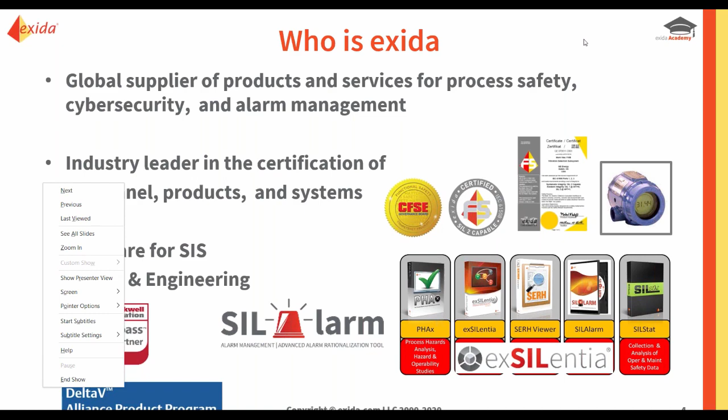So we're going to talk about alarm philosophy. My goal is to make you great philosophers by the end of this webinar. We're going to talk about what is an alarm philosophy, why you need one, what's supposed to be in it, what is the content, and we're going to deep dive into a couple of particular areas like alarm prioritization and classification. And then we're also going to talk about some lessons learned and what are the keys to make this process successful and change the paradigm for the way people do alarm management at a site. So we're going to talk about tips and tricks and lessons learned.

First, a word about terminology. There are specific meanings behind words like shall and should in the standards themselves, and we're going to be talking about both the ISA and the IEC standards, more on what they are in a second. We will strictly interpret the words shall and should according to a specific way. If we see the word shall, that means that is a mandatory requirement, so you must do that. If you see the word should, that's a recommendation. That applies for interpretation of what is in the standard. You should also apply it when you put text in your alarm philosophy document and follow the same convention. If you use the word shall, that is something you're committing to do - that's a requirement of your organization to do that task. And if you were to be audited and it was found that you were not doing that, then that would be a potential finding. So we have to be very mindful of the terminology we're using when creating a philosophy document.

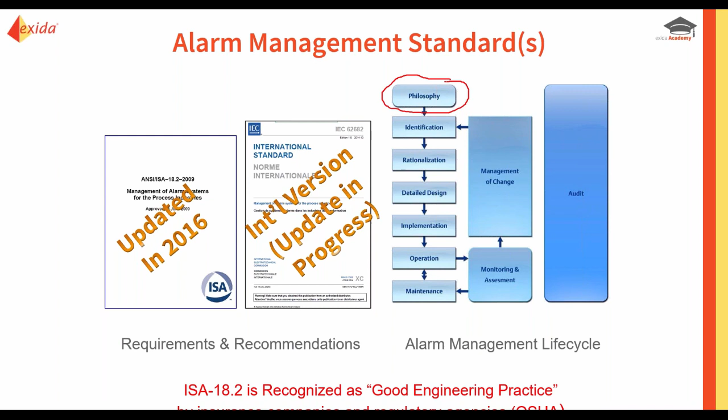It's the first one, so that's what we're going to talk about: how to create the philosophy document that essentially fulfills that stage of the alarm management lifecycle.

If we want to conform or comply with the standards, let's talk about what that really means. If you want to conform to both ISA and IEC, that means you would execute all of the mandatory requirements—any shall statements you would comply with.

When it comes to the use of specific functionality, we'll see that in the standards, there are certain functions that are required to be in the control system. A good example is alarm shelving—a very important tool to help the operator. The capability is a requirement for the control system, but it's not required that you as an end user use it. Your philosophy is where you document what your intent is: do you intend to use that functionality or not, and how? Specifically with alarm shelving, that's an area where we do need to do that.

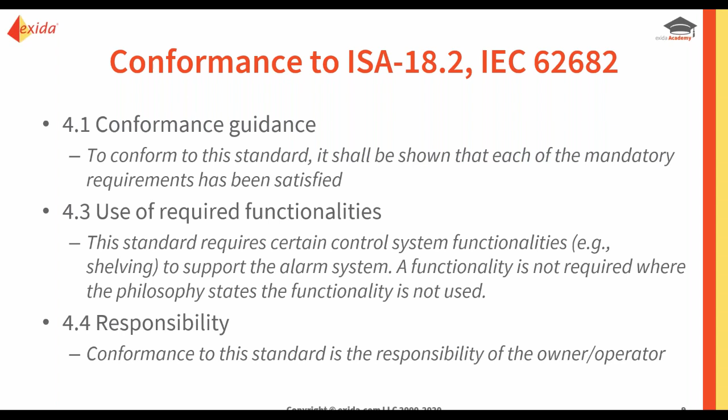When it comes to the responsibility for complying with the standard, that ultimately resides with the owner-operator of the system. So now let's talk about whether you actually need an alarm philosophy and what the guidance is in these standards about having one.

If you are a new system, let's say a greenfield plant, the expectation is that you would develop the philosophy, drafted as part of your project planning, and that you would have it defined and approved before you begin alarm rationalization. Looking at our screenshot of the alarm management lifecycle, the philosophy is really one of the first main steps of getting into that lifecycle.

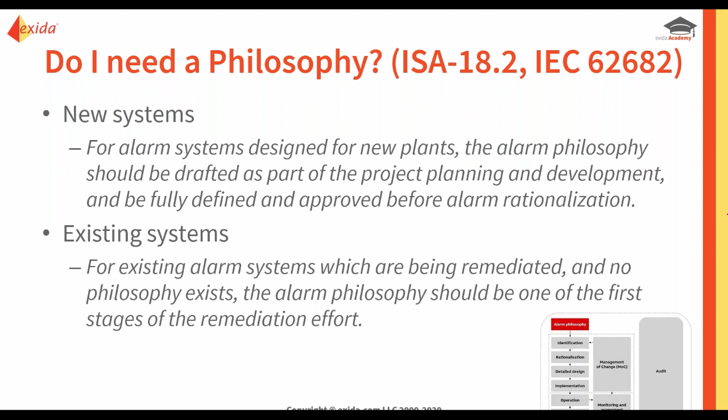For existing systems or brownfields, where you're doing a remediation project to fix alarm management issues, if there is no philosophy yet, then one of the first tasks would be the creation of the alarm philosophy. If you notice, the word 'should' is used in both cases related to having an alarm philosophy, so it's a recommendation that you would have one of these documents.

In terms of getting started, and what you need to do to be ready to do a philosophy, if you're a brownfield existing system, I would recommend doing some initial benchmarking first, where you measure the actual alarm system performance, find out how many alarms you're getting, nuisance alarms, what are some of the different scenarios where the alarm system is not performing well. We'll also do some qualitative assessments with interviews of the operators, which would give you a wealth of input on the shortcomings in the system right now that you'd hope to solve by creating the alarm philosophy document. It's a good input to the philosophy creation process.

You can notice here in this seven-step process that the alarm philosophy is the second step, and it's really the overriding guidelines that drive the continuous improvement approach to the alarm management lifecycle. We really can't enter into the alarm rationalization process without that alarm philosophy in place, because it provides the key rules and guidelines for how to do rationalization.

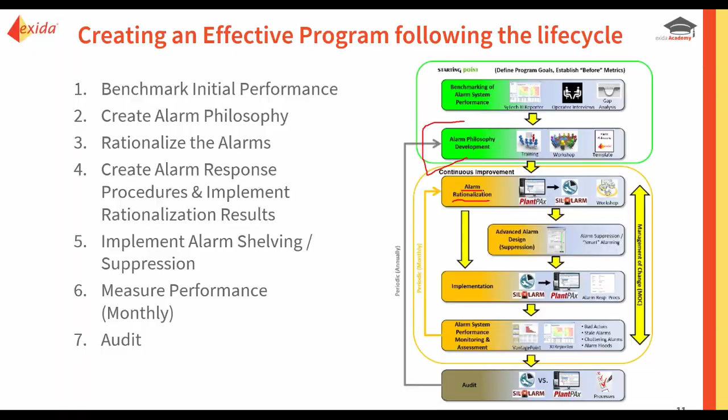Now we're going to talk about what should go into an alarm philosophy, and we're going to see a little bit about the evolution of the standards for alarm management. Standards define the requirements. Here we have a list of the content that is supposed to be in the alarm philosophy, and you can see there are two different options: required content and recommended content—shall and should.

When the standard was first created by ISA in 2009, this is the set of requirements. When the IEC standard was first published, we added the alarm audit topic, something we sort of forgot in the first version. Then when the ISA standard was updated in 2016, we added a few more considerations, some of which we're going to talk about today: alarm response procedures and alarm shelving.

So now we are on to the update cycle for the IEC standard. Basically every five years, these standards need to go through a review and update cycle, so we're going through and reviewing the content here. I would expect that to maintain consistency and build on what's been developed so far, the IEC standard would take on board everything in the 2016 version, and then consider adding or modifying what's there. That process is going on right now.

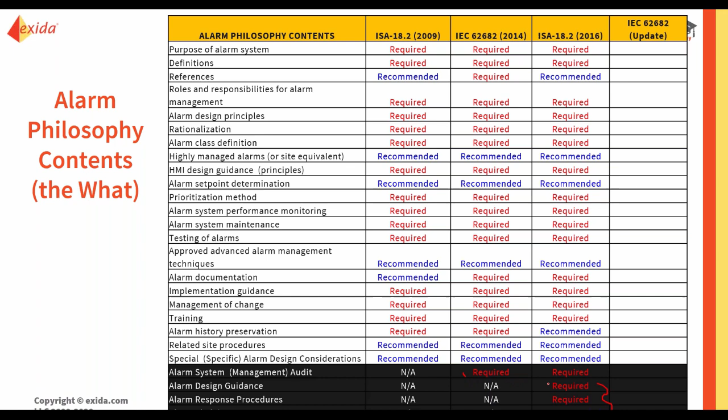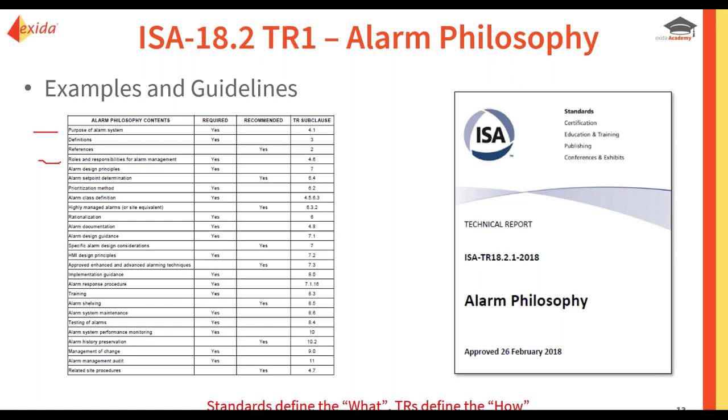Now, the standard defines the what. When it comes to how you do things, that's what technical reports are for. So to help in the development of alarm philosophies and to provide guidelines and examples, there was a technical report created, and I had the pleasure of helping to write that document. It came out in 2018, and for every one of those areas that needs to be defined, there are examples and guidance contained in this technical report. It could be recommendations on how to do things, or examples that one could take and potentially plug into their own philosophy, but it is not a philosophy unto itself. You could not take this document and say, this is our philosophy. It's not designed to do that. It's designed to give you examples and things to think about when you're creating the philosophy yourself.

So why do we want to create an alarm philosophy document in the first place? Well, to create an effective alarm management program that's able to maintain itself and sustain over time, that's what you need the philosophy for. It's really the framework or the blueprint for a successful program, particularly in areas like defining roles and responsibilities for what people in the plant need to do related to alarm management. That's how you create a program that runs on and continues to work even as people change and move to different positions within the organization or move on in their careers. So it's really critical if you want to create that continuous improvement outlook.

It also helps to create a common understanding of alarm management amongst everyone that's touched by it. Alarm management is not rocket science. It doesn't appear to people like it is that challenging or difficult. But if you do it incorrectly, you can cause a lot of problems for yourself. And that's sort of what we've gotten into, where people think they know what to do, but they don't really know the best practices, and they go down a path that leads them to trouble. So part of what we want to do in this process is educate people on a different way of doing things and codify that within the philosophy.

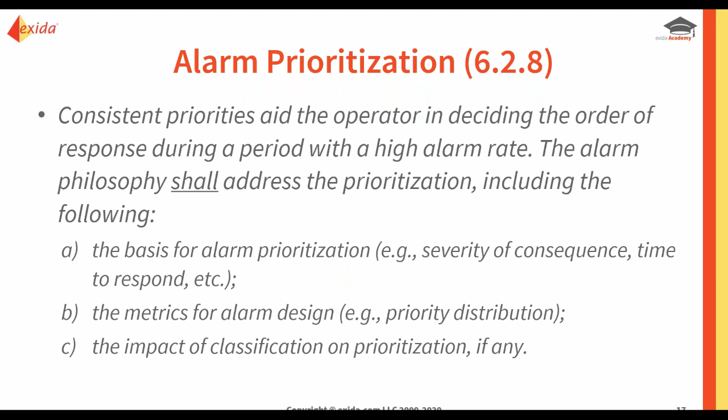So now let's talk about some of the particular topics that need to go into a philosophy. The first one we're going to look at is alarm prioritization. Here on the screen are the requirements for that from the ISA and IEC standards. The alarm philosophy shall address how to do prioritization, meaning we must talk about how you will do alarm prioritization. It then provides some recommendations on content that should be there or that should be considered. So let's dive into how we might do that for a given site or plant.

So the definition and understanding of what priority is for is a key teaching point. People need to understand that the alarm priority is really a way to differentiate the relative importance of one alarm judged against another. It helps the operator know when there are multiple alarms, which one do I respond to first? Which one is more important to the business?

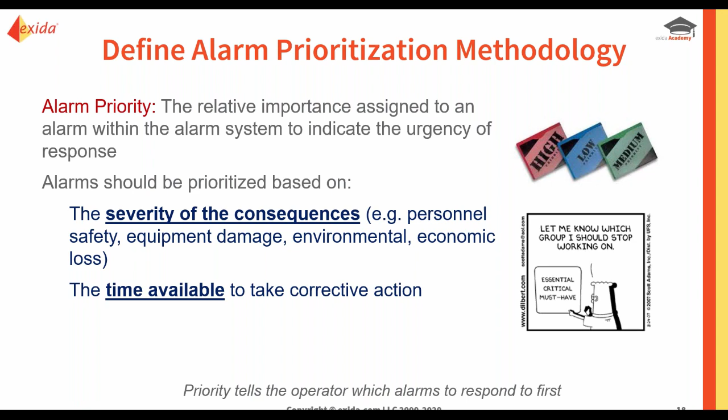And the way you assess that is typically based on some combination of evaluating how bad the consequences would be and how much time the operator has available, the allowable response time.

So in our philosophy, we want to define our alarm priorities. It's not recommended to have any more than 3 or 4 different process alarm priorities. And we're shooting for a priority distribution where we have just a small fraction of the alarms at the highest priority, nominally 5%, more at medium, and the majority at low.

Now, when it comes to the naming conventions for priorities, in some control systems you have the ability to define that, and many of them you do not - it's hard-coded. If you do have the ability to define them yourself, you might want to think about whether the use of high and low for priority names is a good idea.

Because those are also used as alarm types, that means you will have information displayed in the alarm summary where one column says the alarm type is low, and another column says the priority is high. In an upset, that can very easily get confused. So from a human factors point of view, if you can come up with different verbiage for that, it's probably a good idea.

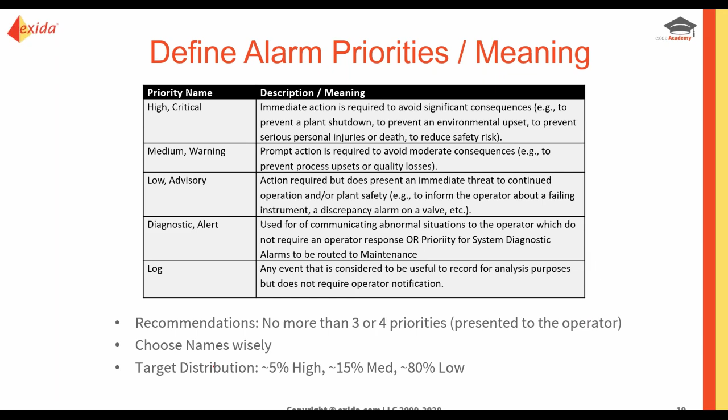You also want to then define how do we evaluate the consequence, how do we judge it? We'll define different impact areas or risk receptors, typically personnel safety - that could be for employees and for the public - environmental and financial. So we want to define what those categories are, and hopefully you don't have to define them yourself from scratch. Hopefully you have a corporate risk matrix that you can use as a starting point.

What we're after here is really this portion that talks about how to assess or evaluate the consequences. It has our impact areas, and as we go from left to right or right to left, the consequence decreases. Now, another part of this matrix up top is the likelihood and the risk. Well, that's not relevant for alarm prioritization. Likelihood or probability is not part of the prioritization methodology. We're only interested in the consequences here.

So ideally, we want to start with this because this is a reviewed and vetted matrix related to business impact and risk management that's likely been reviewed by legal, probably, as well as process safety, etc. Now, when we look at this, to make sure it's going to work for alarm management, we might make a few changes.

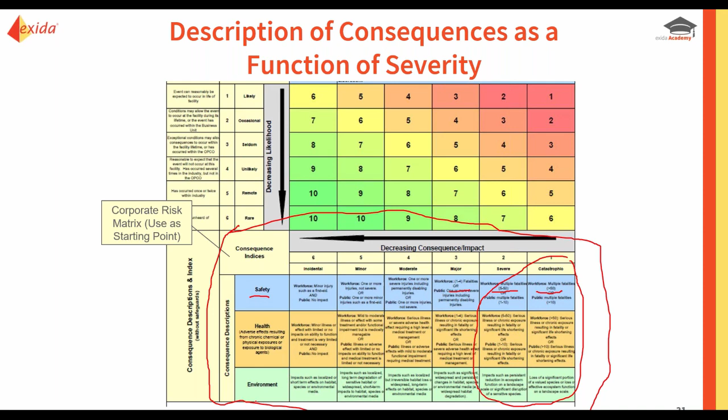The other element of tailoring a PHA matrix for use with alarm management is we need to have some financial considerations. In this one we're looking at, we have personnel safety and environmental, but we don't have a financial way of evaluating the potential consequence of an alarm. And what you typically find during rationalization is most of the consequences are financial related, either a cost to production or damage to equipment and assets. So we need that to make a complete matrix.

So here's an example of a matrix that does, in fact, in this case, have some financial considerations. So other things that we need to consider: we need to make sure that the terminology is pretty understandable, that it's unambiguous, that everybody would assess the consequence in the same fashion and come up with the same answer, ideally.

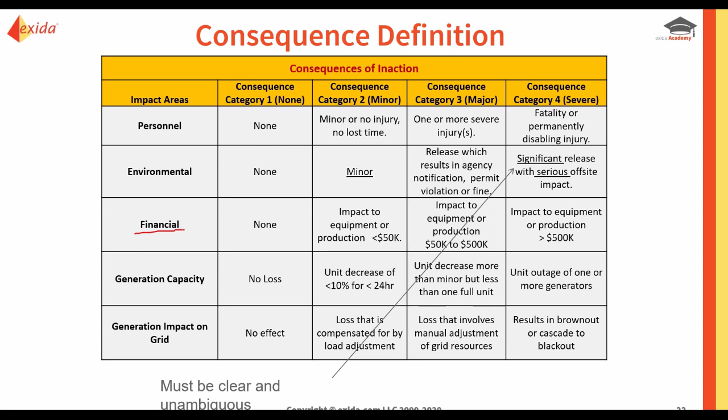We also need to make sure that it's understood that the consequences described in a given column should all be considered equivalent criticality. So that means we have up here fatality, and down here we have a financial loss of $500,000.

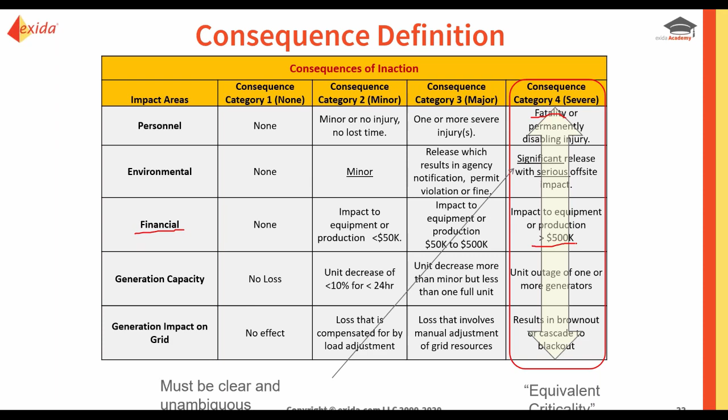If those are considered equivalent, we've just put an estimate on the value of human life, and it's not very high. So if an incident occurred and someone lost their life, a lawyer could look at this and say your risk management approach did not value human life very significantly. So you never want to take somebody else's matrix and use it as your own. This has to be developed and vetted internally within the company with consideration from safety and from legal.

We also need to define some way of evaluating how much time the operator has to respond. We'll call that the allowable response time. One way to think about it is either you need to drop everything and respond to the alarm right away, or you can finish up one task and then respond, or perhaps the alarm is not as urgent and allows you to start a new task before you begin the response. Some kind of way to qualitatively estimate how much time the operator has to respond.

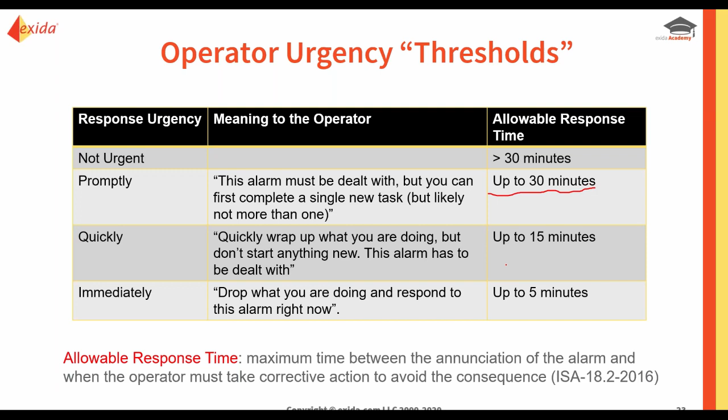Some other things to consider in this case: we might want to note that we need to do something different if we end up with an alarm where the operator has less than 5 minutes to respond and they're doing that to prevent a fatality. That's not a good design case. So we would want to try to do something to add other layers of protection.

Ideally, we want to ensure that there's sufficient urgency anytime an alarm occurs. So something that's got more than 30 minutes to respond, sometimes I've seen people treat that as a no-alarm situation. Well, I'm not sure that's the right way to do it, because there is still going to be the consequence. So maybe it's a lower priority alarm, but there's still some potential that something is going to happen.

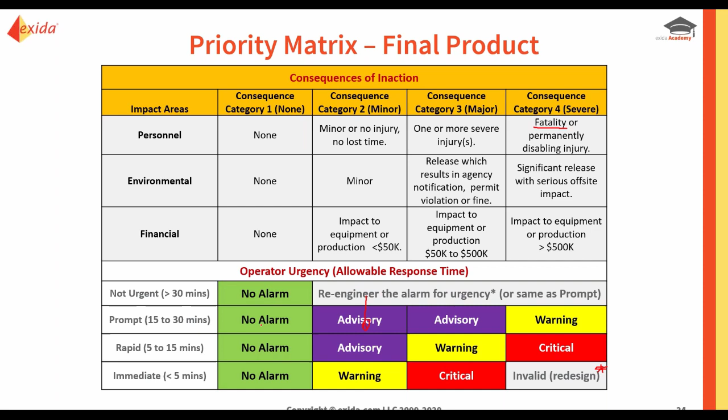So in some cases, we may try to change the design to push the alarm into something where the operator knows that they need to respond relatively quickly, or we may just say that the priorities for this band are the same as what's down here in this row that says prompt. So advisory and warning in this case.

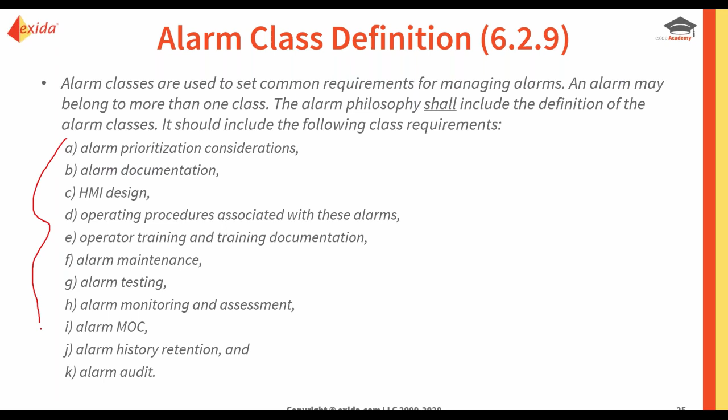So now let's talk about alarm classes and alarm classification. The alarm philosophy shall include the definition of the alarm classes. So you need to define what classes you're going to use. And when it comes to that definition, relevant information about these different characteristics should be part of that.

So classification is really a process for assigning alarms to groups that have common sets of requirements for things like testing, training, MOC, and reporting—anything related to the management of the alarm. This gets to the fact that not all alarms are created equal, similar to passengers on a plane and the way airlines treat first class passengers differently than economy class. Same goes for alarms based on the alarm classification.

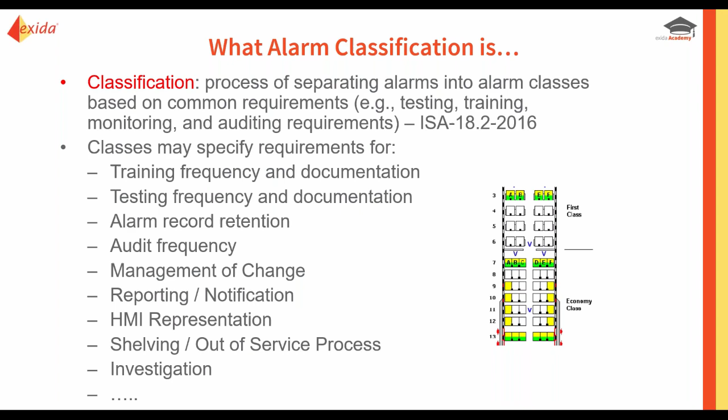So one way to think about classification is that it indicates what is the main purpose of the alarm—what are you trying to do with it. So it allows you to differentiate, of all the alarms in your system, which ones are there really for personnel safety, which ones are for environmental.

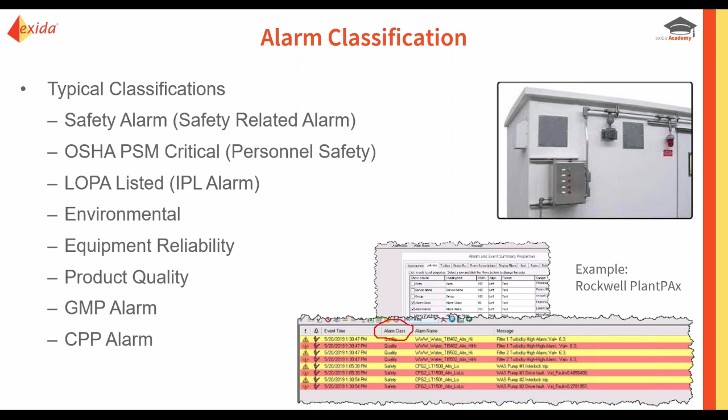And we're going to look at some examples that relate to alarms that we will say are LOPA listed, meaning they're called out in a layer of protection analysis. One of the things we're also going to talk about is how alarm classification shows up in the control system. Here we have an example from a Rockwell control system where the alarm summary display has the ability to present the alarm class, and that's a parameter that can be filtered by—so it's native in the control system.

Now there are different acceptable ways to interpret alarm classes and what they mean. The one that we have talked about is using categories that kind of directly relate to what the purpose of the alarm is.

Is it for personnel safety, equipment reliability, or product quality? That's the recommended approach, I would say.

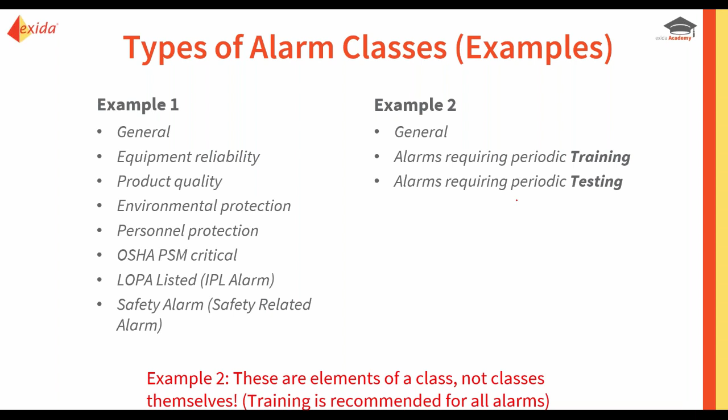It is also acceptable, though, when you interpret what's written in the standard and in the technical report, to create classifications that relate to alarms that require training or alarms that require testing. I have seen some alarm philosophy documents created that way. To me, personally, that second example is not the best way to do it. If you do it that way, you're really losing out on a lot of the potential benefit of defining the classification. Let's see what I'm talking about.

Part of what we're striving to do is define, for our different classifications, the fact that they have different requirements when it comes to things like testing and training, and it's up to you to define what those associated requirements are.

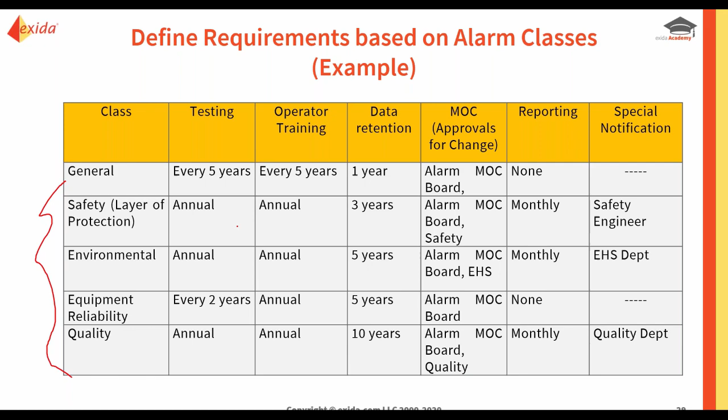One question that always comes up during an alarm philosophy development project is testing and training. The question is, does that mean I have to test every single alarm? Does the operator need to be trained on every single alarm? Well, no, not necessarily. Ideally, you would do that based on classification, setting the frequency or need based on the classification, in a way that balances risk versus the amount of resources necessary. Now let's talk about highly managed alarms.

This pertains to classification, so it's a continuation of the classification discussion. The standard defines what they are to a limited degree, but it also helps direct the interpretation. It says highly managed alarm classes—note that it's plural—are classes of alarms that require more administration and documentation than others. Then it provides some examples of how you might designate or determine that something is a highly managed alarm.

Just like there are different interpretations of how to define classifications, there are also different interpretations as to what a highly managed alarm is and what that means. A highly managed alarm is an alarm that belongs to a class that has more requirements than your general alarm. An example would be a safety alarm or something that's there for personnel safety.

If we think about the alarm associated with this analyzer shed, if someone disabled that alarm or changed the alarm set point, it's possible that somebody could walk into that shed when they shouldn't have, when that beacon should be going, the door closes, and they may never come out. So that is a really critical alarm—you could potentially die if you misinterpret or misrespond to it.

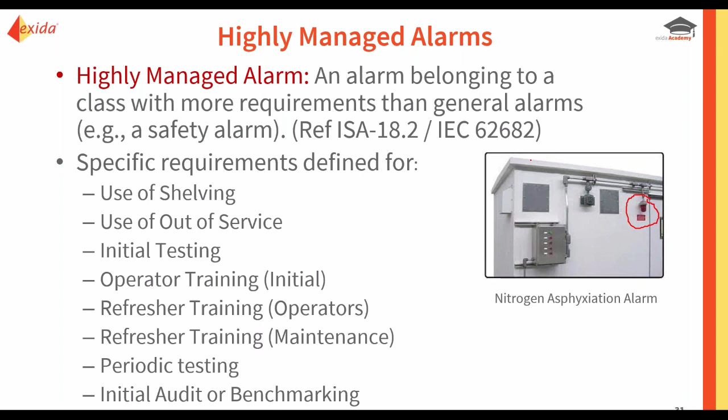One of the origins of the concept of highly managed alarms comes from the OSHA PSM regulation. If you think about what OSHA PSM would likely require you to do for alarms that would be part of an OSHA PSM program, the list is pretty close to what we've defined here for highly managed alarms.

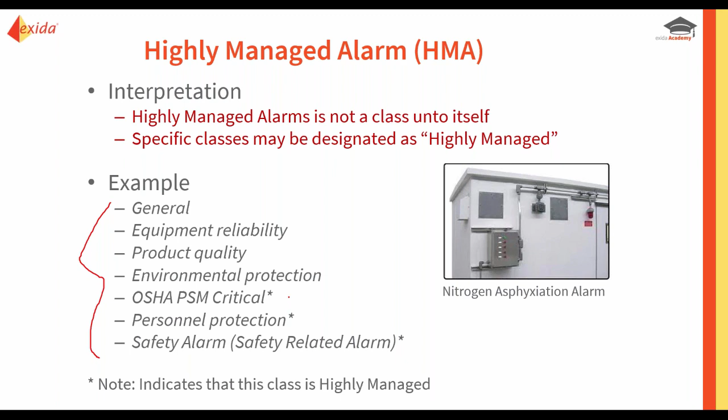Again, interpretation of what that means varies across industry. Some people have interpreted highly managed alarm as a class unto itself. I believe that is not correct—it might be acceptable, but I don't believe that's the intended way. It's supposed to designate, among the classes you've defined, which one or ones should be treated as highly managed alarms. So if we have this particular grouping of alarm classes, which ones would be considered highly managed? That's the appropriate way to apply that designator.

The significance of all this is there's a significant amount of prescriptive requirements within the standards related to what you must do if something is a highly managed alarm. Here's an example of what should be documented for the initial testing of the alarm—some pretty significant stuff. As I mentioned, you can trace this back to OSHA PSM and what you'd need to do to conform with that regulation if you're envisioning an alarm being part of it. In general, the standards don't have a lot of prescriptive requirements, but this is one scenario where they do.

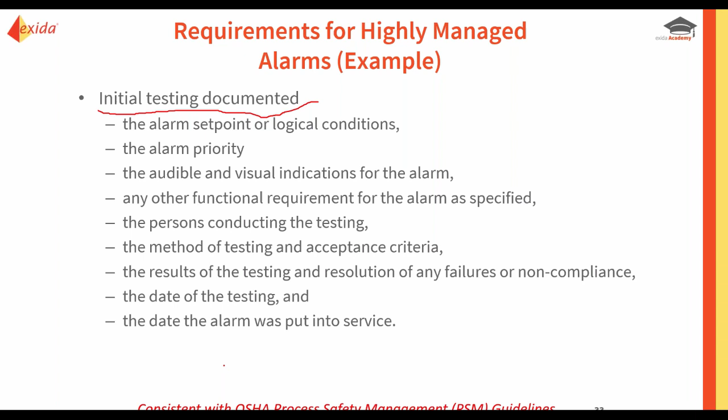The way you have these requirements on you or not is based on whether you designate your alarm classes as highly managed alarms, in which case the specific requirements in the standards must be followed. Those are requirements. Now, if you've defined classes the way we talked about, you can get a lot of value in understanding what's happening in your operation. One way is when defining your KPIs, your performance evaluation metrics, to set class-specific metrics.

If we look at an example of a LOPA listed alarm class, these are alarms being used as independent protection layers with a quantified level of risk reduction. So alarms used for that, and why might we want to analyze their performance?

If you can see in this layers of protection analysis or schematic, operator response to an alarm is one of the first early layers of protection, and it hopefully takes the brunt of the activity to prevent the need for a demand on the safety system. But that is what will happen if this alarm fails to work.

So being able to measure, for our safety alarms, our LOPA alarms, how many times they activated is an indicator of how many times your hazard got to this point in your process, which is pretty awesome information to have, and hopefully it's not a high number.

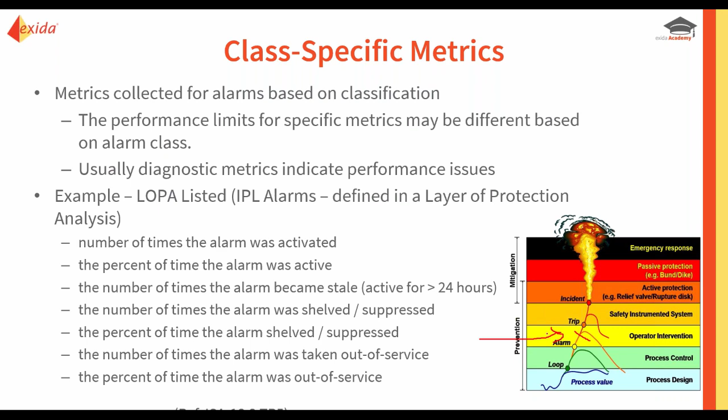It also gives you information about how well this layer of protection is actually working. If you're disabling that alarm, or it's being suppressed, or it's a nuisance alarm or a stale alarm for a significant portion of the time, then you've just reduced the potential reliability of that layer of protection and made it so that your safety system is about to be hit with a lot more demands than it would otherwise. So fantastic information you can get.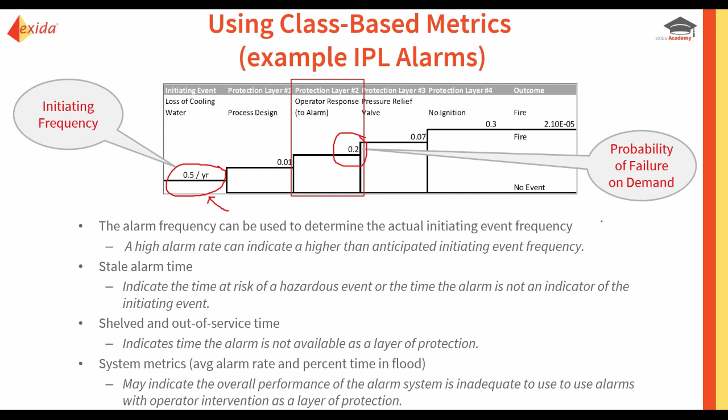We would also know, based on how that alarm is performing and whether it's a nuisance alarm or a stale alarm, that the level of risk reduction we assumed, in this case the probability of failure on demand, might be compromised and would not provide the level of risk reduction we're counting on. So from two points of view, our layer of protection analysis would really need to be revisited and would be not correct.

Now, if you define the classes in the way that we recommended or just talked about, you can get the reports and things that we just mentioned.

Now, in different control systems, the usage of the alarm class is different from one system to the next. Some have class as a very prevalent attribute that shows up within the alarm system. In some, it's an optional parameter that you can add after the fact.

And you can also run reports based on that category of alarms, that classification, to get those metrics we talked about. So here's an example where if you define classes in the way we mentioned, you can get a lot of great information about performance just by using that within the DCS and the functionality that's provided.

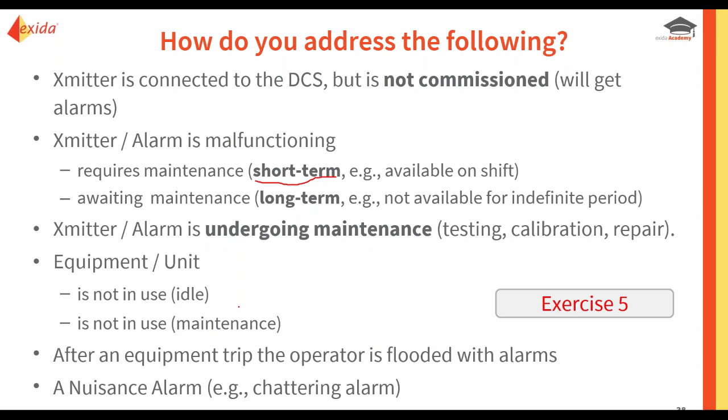So when we help people create an alarm philosophy document, we actually have an exercise where we create these scenarios and first talk about how do you deal with it today? Then we talk about the functionality available in the control system for alarm suppression, and we go back through it and say, how could we do it better in the future, leveraging the capabilities built into the control system?

So for alarm suppression, that's the ability to hide an alarm from the operator when they don't need to see it. There are three different types of suppression defined. I won't go through them in gory detail, just mention that alarm shelving, one of the forms of suppression, is meant to be a tool for the operator.

It's meant to allow them to temporarily suppress an alarm for a fixed period of time, typically used when you have a nuisance alarm—some alarm that the operator uses their judgment to say is impacting their ability to focus on other alarms. It's not relevant at this point in time. I want to remove it from my field of view, but I don't want to lose the fact that it's there. I want it to come back after a certain period of time.

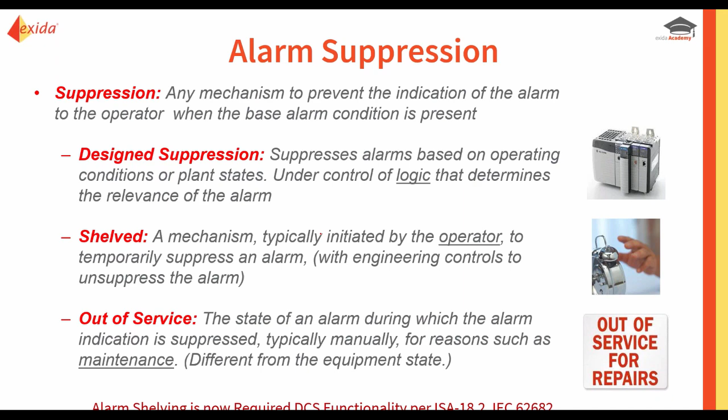Now both standards have set it up so that alarm shelving is required functionality of the control system. So what's necessary for you to do when you create a philosophy is talk about how you're going to use alarm shelving, whether you're going to use it or not, and if so, how. There are different types of alarm shelving, and it's implemented differently from one control system to another.

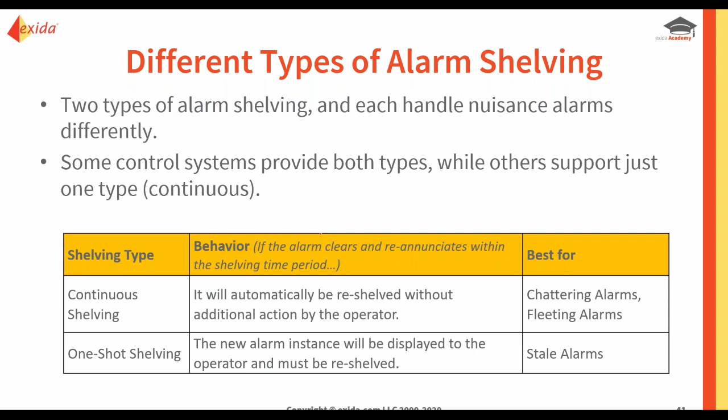This in particular is one of the examples where an alarm philosophy needs to be tailored to the functionality of the underlying control system. And if you don't know what that functionality is, your philosophy is not going to be able to address this as well as it could. More on that in a second.

So if we're going to put alarm shelving in our philosophy, what do we need to think about? Well, shelving is a great tool to help the operator deal with alarm situations, but you probably don't want operators to be able to shelve every alarm. Maybe you only want them to shelve low priority alarms, or base it on classification. So that's part of the thought process.

What alarms can be shelved? What can't be shelved? How long can they be shelved for? Is there an authorization process required? Does the operator need to get authorization from a supervisor to be able to do it? Are they recording the reasons?

As part of this, we would want to build into the operational work practice that the shelved alarm list is reviewed on shift change and talked about during that handover.

We also might want to document what action we expect of the operators when they're shelving an alarm. We don't want shelving to become just something we use to push off resolution of the underlying problem. We'd want to say, okay operators, if you're going to shelve alarms, the next step is to write a maintenance work order or something like that that drives the correction of the problem.

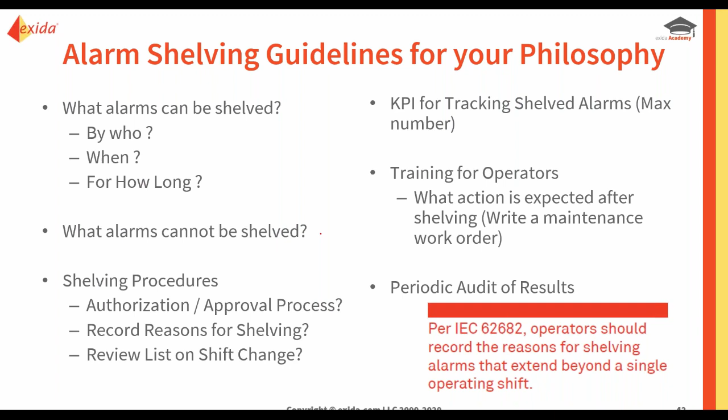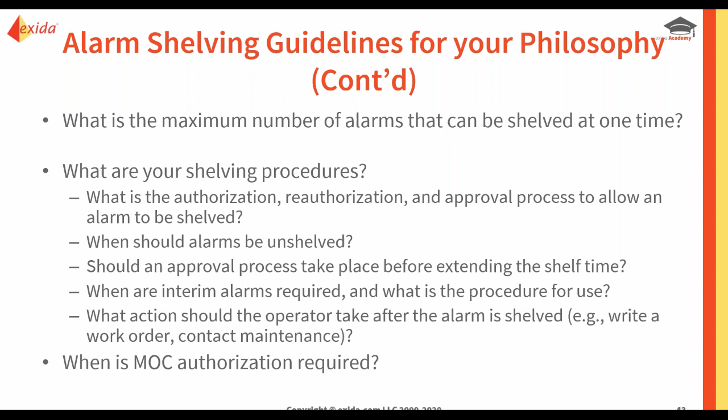So those are the kind of things you want to think about, as well as some more considerations related to the use of interim alarms or some of the procedural elements related to the use of shelving.

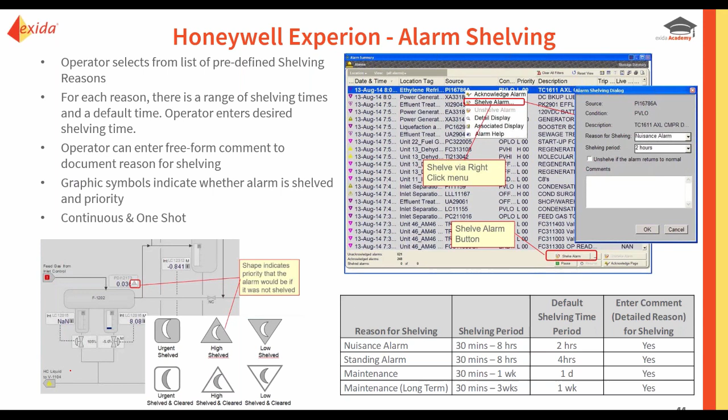Now here's a quick overview of some of the differences in functionality from representative control systems. Honeywell is one control system that supports both shelving options for predefined reasons for shelving. There are certain bands of shelving time allowed for alarms, and operators can select that. They can document their rationale for shelving an alarm, and a shelved alarm shows up as represented within the HMI. So that's a certain level of functionality.

Rockwell implements it quite differently. Here, instead of the shelving definition taking place at the HMI, it's actually behind the scenes in the configuration. Each alarm has a checkbox to indicate whether it can be shelved or not. It also has a parameter to define what the maximum shelving time is.

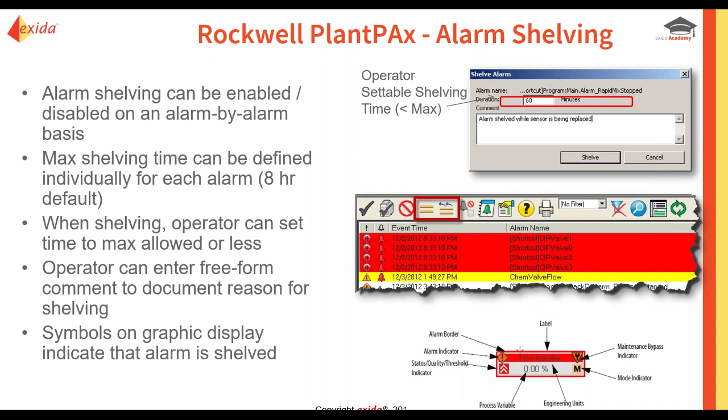So you can really define on an alarm by alarm basis the shelving behavior. In a PCS7 system, there is a single shelving time that's system-wide, with a limit of just less than 10 days. So it operates differently from what we just saw.

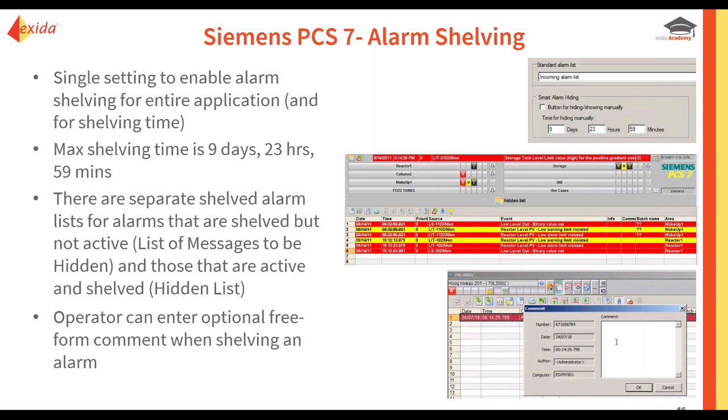It has two different lists, one that lists shelved alarms that are still active, and one that lists shelved alarms that have cleared. That helps you know, when an alarm becomes unshelved, whether it's going to reappear on your alarm list or not. In a Yokogawa system, for example, you have both types of alarm shelving, but the maximum time an alarm can be shelved for is 24 hours.

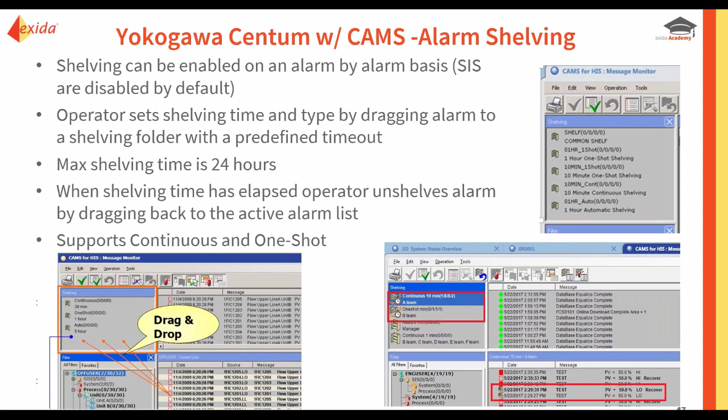So every control system supports shelving in a different way. And if you don't understand that, I don't believe you can flesh out the best way to use that functionality in your alarm philosophy.

Now let's jump to the last topic, alarm response procedures, or alarm help as it's often called. In the standards, alarm response procedures are required in that they shall be readily accessible to the operator as specified in the alarm philosophy. So you define how you're going to use alarm response procedures. It also talks about how they should be accessible and what type of information should be included, with a recommendation on the content that would be expected unless something different is defined in the alarm philosophy.

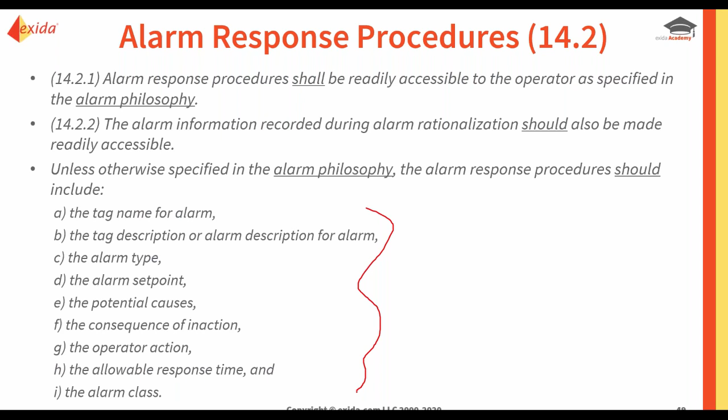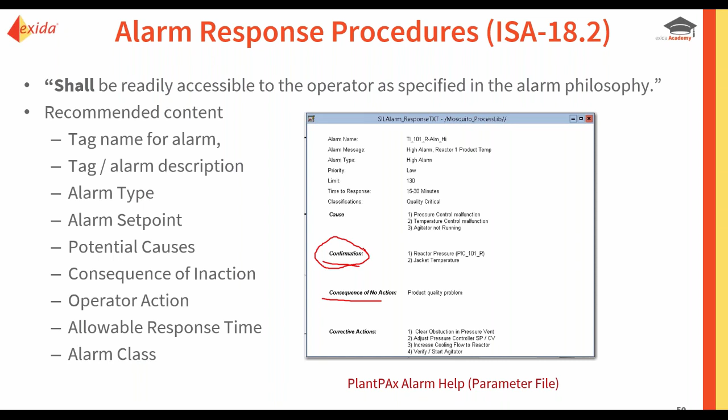Here's an example of an alarm response procedure for a Rockwell PlantPAx system, where from the results of rationalization we're able to present this information to the operator, with some additional information that's not part of the required set but adds additional benefit to the operator when it's displayed to them.

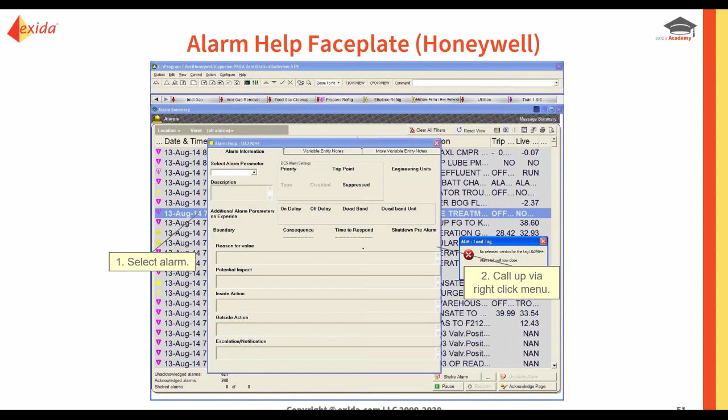Honeywell implements it in a different way, with different levels of information called different things, but certainly a lot of good information potentially for the operator to help them know how to respond to the alarm. Emerson in DeltaV has a different implementation method in their alarm help, again showing some of the key information.

This slide shows the linkage between alarm rationalization and the creation of these alarm response procedures. What you will find is that the information needed for these alarm response procedures is what you talk about and document during rationalization. To define that this is a needed alarm, we document the cause, consequence, corrective action, and that's exactly the stuff you want to put into your alarm response procedures. So they really go together.

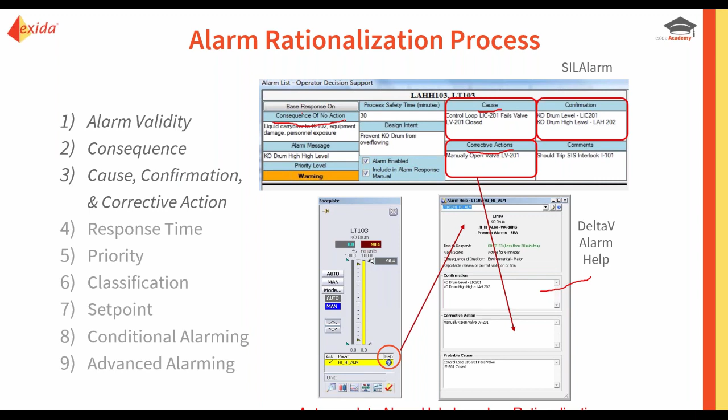In fact, I would not consider doing an alarm rationalization unless I thought about and knew how I was going to make that information available to the operator. It's such a compelling benefit that I think the two should be treated together. If you don't have a way to present that information to the operator, I wouldn't start with the rationalization yet—that's a personal opinion. But more and more control systems support the ability to present that information natively to the operator within the system itself.

One common pushback we get is, 'You mean I'm going to have to create an alarm response procedure for every single alarm in my system?' Well, no, actually not. If you define your requirement as for each rationalized alarm, you will create the alarm response procedure. If you do rationalization, then you have the information you need to create it.

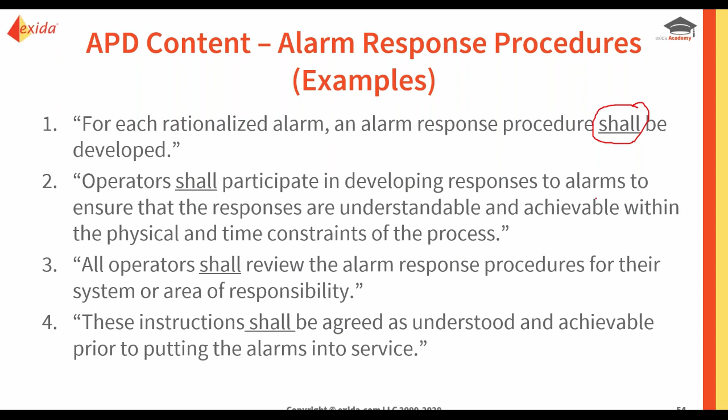So that was a look at some of the key content. Now we're going to look at some lessons learned when it relates to alarm philosophy development. How do we make this process work? So how do you know when you have a good philosophy? What does it look like? Well, it's well adopted, widely adopted, and understood by the key stakeholders.

So operations, maintenance, design engineers, configuration engineers, project engineers - hopefully they all understand how it impacts them and their role, and they are taking that into account in their jobs. It also needs to be supported by management. I probably wouldn't start this project unless you had support of management, because you are setting up a program that requires resources beyond yourself.

So having management support for that is a key. You also want to make sure, I believe, in an alarm philosophy that you provide actionable guidelines. In some cases, there's generic terminology put into philosophies, and some of that is what you see in the ISA or IEC standards itself. In some cases, it might be appropriate. In other cases, I don't think it is.

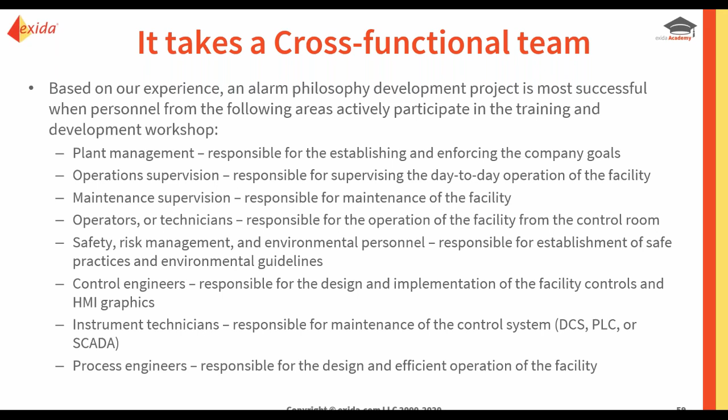It really does take a cross-functional team to create an effective document, even though you as a single person might know everything that should go into it. Without the participation of other groups, it's very likely not going to be adopted to the level that you would like. You can see the list of key stakeholders shown here. Plant management might be involved for part of the time, but certainly operations, control system engineers, process engineers, supervision, and safety are all key people to take part and drive the content.

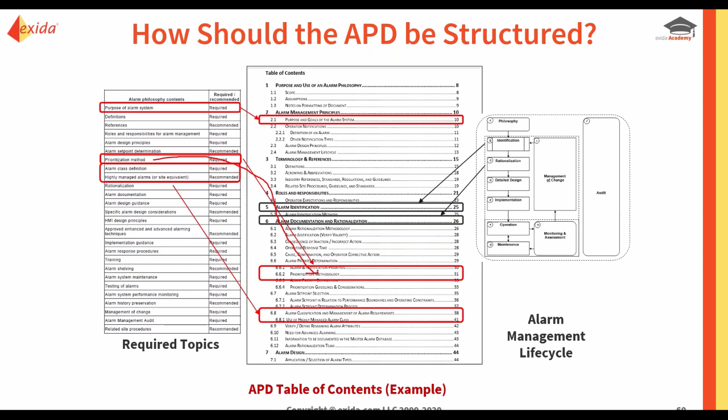A better approach is to generically set the structure based on the alarm management lifecycle. You could think of it as a clause or section for each stage of the lifecycle—maybe some grouped together—but within each of those, wherever the particular sections fall, you include them in the document and the table of contents. That way you have a structure that follows the alarm management lifecycle and is traceable to the requirements of the standard.

How do I know that I have everything covered that I need to? The ISA and IEC standards define the requirements and recommendations for what needs to be there, so you could compare your philosophy to what's called for in the standard. There are 27 sections, or topics, and in each of those there are specific requirements and recommendations called out. That would be one starting point.

Now, if you do that, you also need to make sure you capture the requirements in other sections of the standard, such as some that show up in basic alarm design that actually drive what's supposed to be in your philosophy. So if you're doing a complete audit against the requirements, it's not just the clause on philosophy you need to look at. That's something we can do to help people—perform an audit of their alarm philosophy and create a gap analysis document or assessment identifying what's missing and what could be improved.

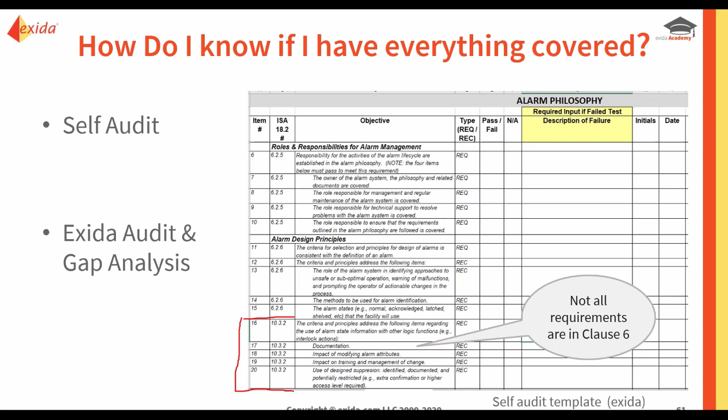How long should the alarm philosophy document be? This is a question that often comes up, and I've heard comments indicating that we want the alarm philosophy to be short—for example, that if the document is longer than 10 or 12 pages, colleagues won't read it. I've heard that statement before.

If we look at what the philosophy is supposed to do, it's really setting the framework for alarm management and all of the lifecycle stages. I don't believe you can address all of that required content to the degree that's useful and necessary in a 10-page document, so there's a disparity there.

There are possible ways to address the problem of having to read a 50 or 60-page document. One way is to break it up into multiple documents—one that's more of a design guideline versus a philosophy. Another way is to have a high-level philosophy with other documents that go into the details. Recommendations could be put in an appendix, or you could add a section at the beginning that says, depending on your role—like if I'm an operator—what are the important sections for me to read and understand that impact my job. That basically takes a 50 or 60-page document and hopefully allows it to be easily filtered for the different roles that need to review and digest it.

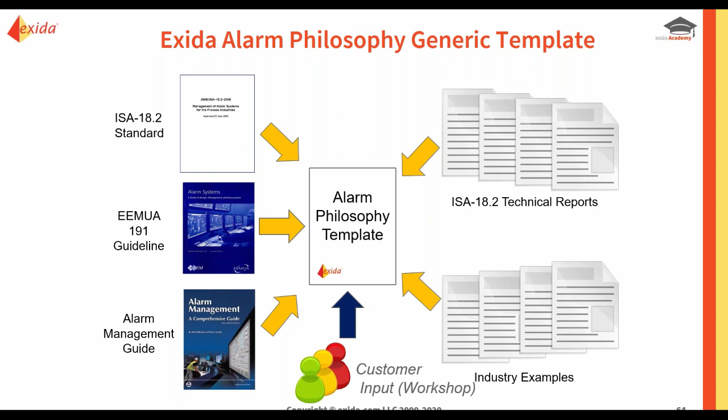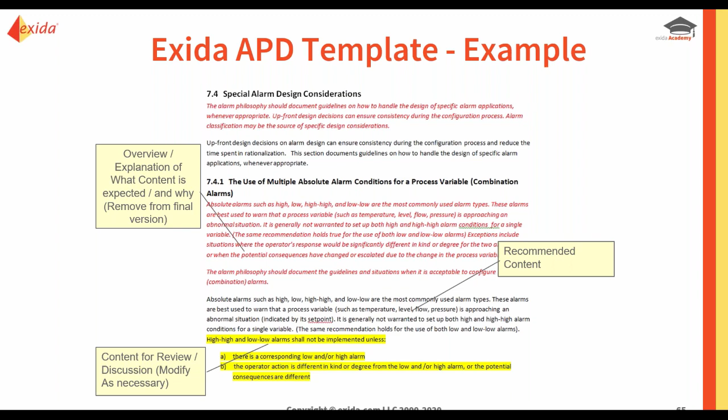This is an example of what the content looks like. It's got explanations of what's supposed to go in each section, and then the representative text and which points need to be reviewed or discussed.

So we're reaching the end here, and I apologize for going longer than what you might have expected.